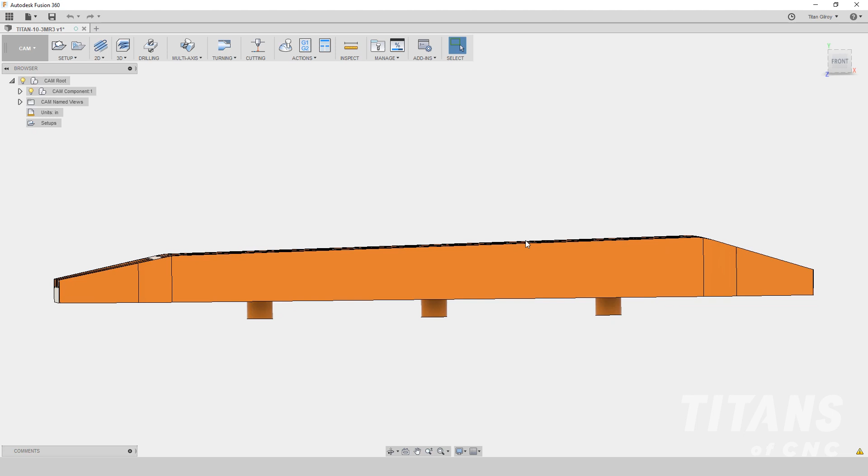See, this is smaller than this, so it's actually tapered. So you can't just mill it and flip it over and cut it. You'll actually have to multi-axis surface all the way up. You got to cut all through here, all the way up here, boom, boom, boom. You got to make it happen.

And then check this out—boom, there's islands. Yes, let's just make it crazy. Let them have some fun. And that's what we're doing.

So when looking at this part, if I did this side first, then when I flip it over, the whole thing would be cocked, right? It'd be kind of weird, hard to sit. You'd have to create soft jaws to make it parallel.

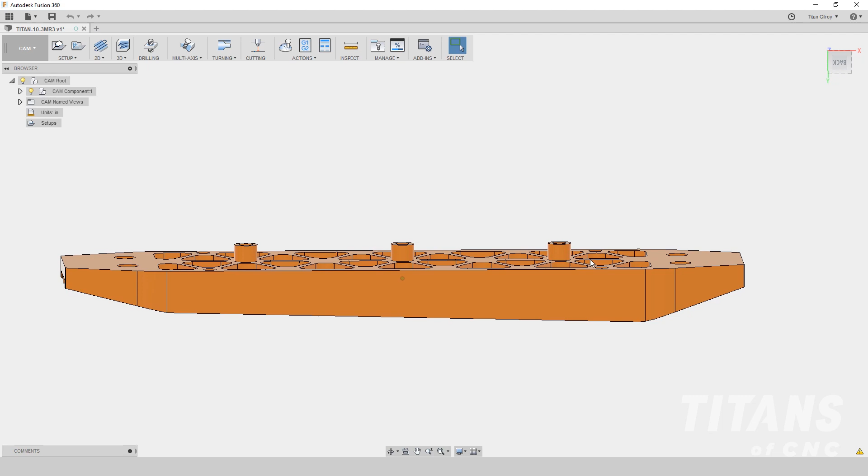So what I'm going to do is actually do the bottom first, that way you can set it in soft jaws or hard jaws and actually set it nice and flat, then do this side afterwards. So first side, we're doing this side. We're going to cut the pockets in right now, profile it, and make it happen. Okay, so let's do it.

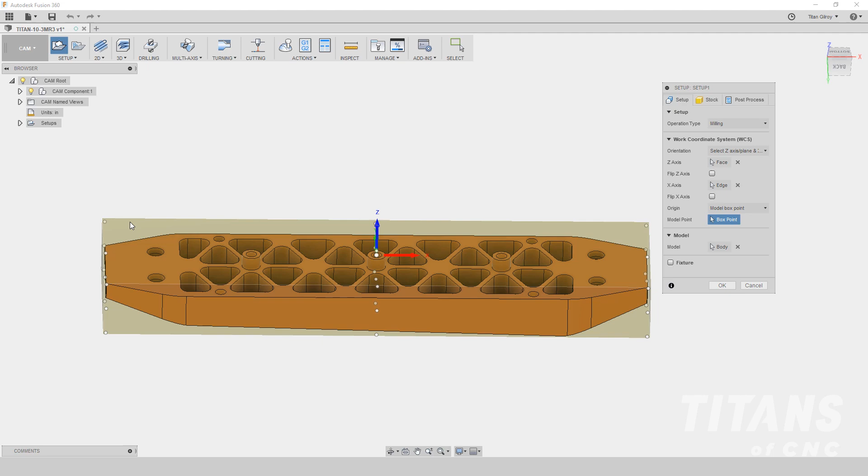First thing we're going to do is go up to setup, come up here, set up our job. So model Z—I'm going to hit this guy right here, boom. I'm going to come over here. X, it's already in position, but I'll just hit this guy right here. Now I'm going to say model box point. I'm going to hit it right here, boom, boom. Looks perfect. I'm going to come up here to stock.

I'm going to go all sides, 0.050. I'm going to tab down—0.050, 0.050, 0.050, boom, boom. I can see it right here.

We don't have a lot of material here. Usually this is at 750, but now this is a bigger part. From my experience, if you have about 100 to 120 thousandths, that is good enough to hold on to. But right here, if you look at 1x2 material, it means we just have a little bit over 150 thousandths. So I'm going to take, let's say, 25 thousandths off the top, and then we'll take off the rest, an eighth, from the bottom.

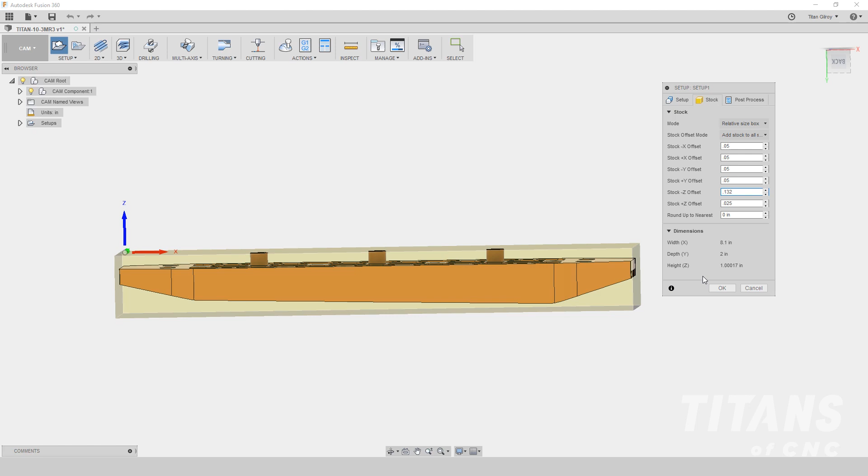So we're going to go right here, and I'm going to go 0.025 right here. And then down here, I'm going to go 0.1, say 132. So I'm real close right here—that's good enough, see that right there? So it's 1x2 by 8.1. So I'm going to say okay, boom, we're all set up.

We're still upper left. It looks a little weird because this is like a bottom surface right here. The surface is so big down here and the islands are keeping it up high. All right, so what's the first thing we're going to do?

We're going to start cutting with our 1/2 inch. If somebody had a face mill that was smaller, like a 1.5 or something, you probably could get it around here, boom, boom, boom, and actually come in and hog this out. I'm just going to use the 1/2 inch cutter.

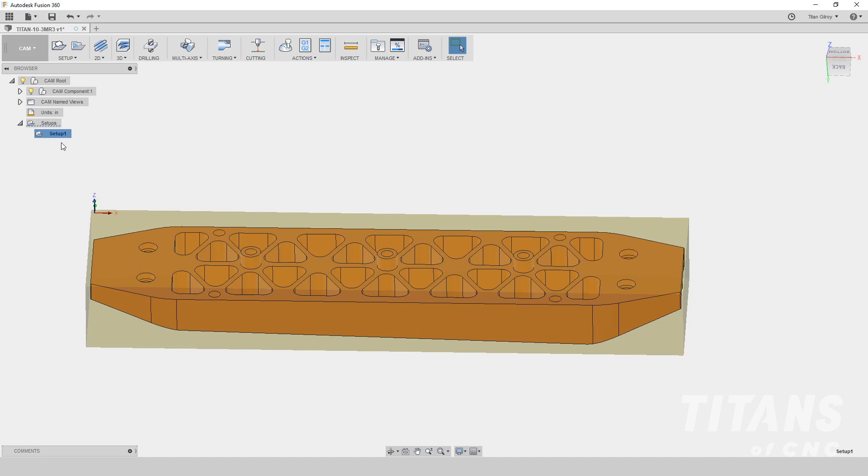So we're going to come up here, go to 3D adaptive, boom. I'm going to grab my tool. I'm going to come over here to building blocks, come right here, 1/2 inch. Oh, right there, okay, 4,000 RPMs.

I'm going to tab all the way through. I'm going to go 25, 25, 25, 25, 100. I'm going to come up here—it already knows where I'm at, it knows where my material's at. I'm going to turn off rest machining because we have not machined anything yet.

I'm going to come over here. Model top, I'll leave it alone. Model top, model top, model bottom. So model bottom, I'll actually go negative point. I'm not going to go that much now.

All right, so we have a sharp corner on that end mill. I'm not going to go too much because I don't want to cut into my jaws, right? So I'm just going to go 0.005, just a little bit, okay? You can see it's just going to be barely anything right there.

All right, so now we're going to come up here. I'm going to come down, boom. I'm going to say we'll just do 0.075 right there.

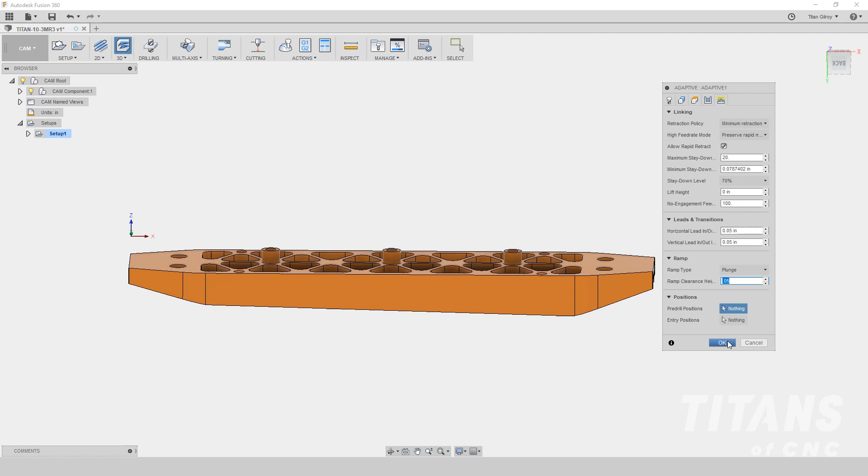Okay, so let's just do it. Boom. You see it up here? It's creating its path. Boom, boom, boom.

And it looks good, so you can see it went around. Path looks nice, it looks clean. So you can see that there's the part down here, the end mill's coming all the way around. It doesn't really matter, we're roughing all this out anyway, you know what I mean? So I'm just saying that the full depth is going around, even though this is skinnier, it's going to be okay.

All right, now that we have roughed it, we're going to go back and finish it with the same tool. So we got to finish the top, finish the bottom, and we're going to profile it with the half inch tool. So let's just get to it.

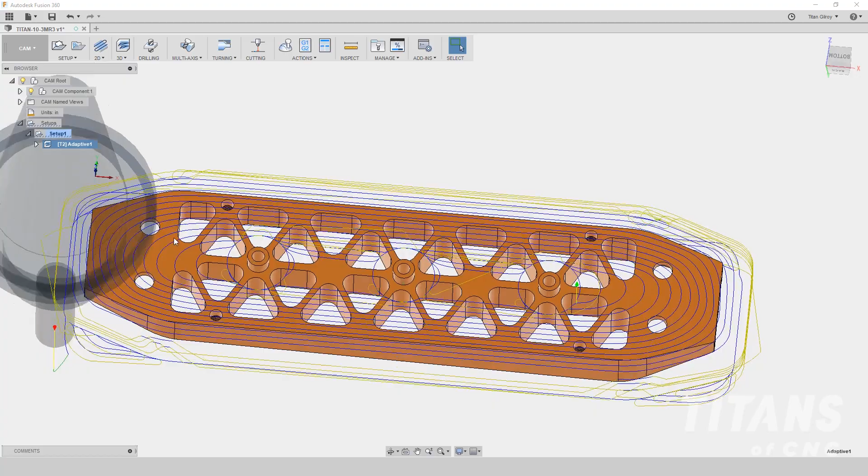So one thing from experience and looking at this tool path and wanting to actually cut off of the surface over here, I'm actually going to prepare something. So just stay with me. I'm going to come back up here.

I'm going to go to model, I'm going to hit model. I'm going to actually come up here, I'm going to say sketch. I'm going to drop all the way down to offset, I'm going to say offset. I'm actually going to come over here to this bad boy right here, click it, then I'm going to click this guy right here. It gives me that offset right there.

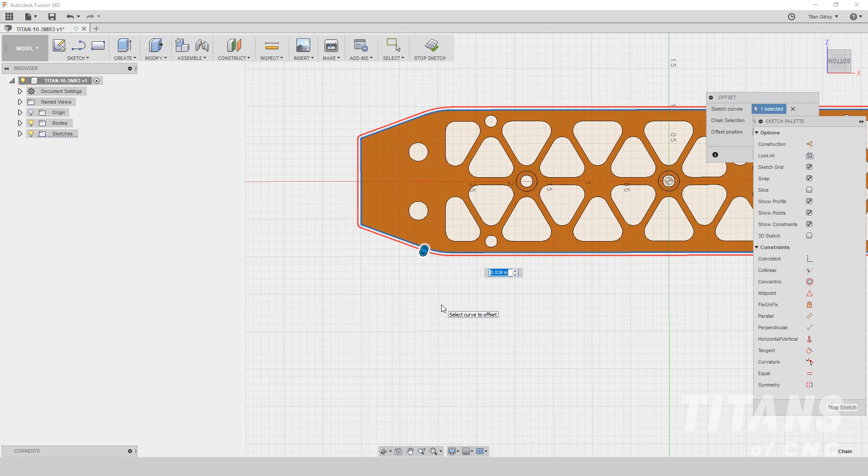See that? So I'm using a half inch end mill. So I actually want to come off and have my half inch actually come off over here. So I'm just going to go a little bit big. All right, so I'm going to go 0.2. See how it does that? Boom. Okay, so that's something kind of cool right there.

And then while I'm here, I'm like, okay, I need a cool tool path that I can just walk across these guys, something quick and dirty. Okay, so I'm going to say stop sketch right there. I'm going to come over here and I'm going to just say line. I'm going to select this guy right here. Boom. All right, I'm going to actually pull this over here.

I'm going to come up here, I'm going to hit that. So I know that this diameter right here is like 2 to 300 thousandths, right? So I'm just going to come over here, pick a line. So looking at this, I'm going to come over here, pick a line, boom. Then I'm going to draw a line coming all the way over here, off the part, boom, right? Then I'm just going to escape.

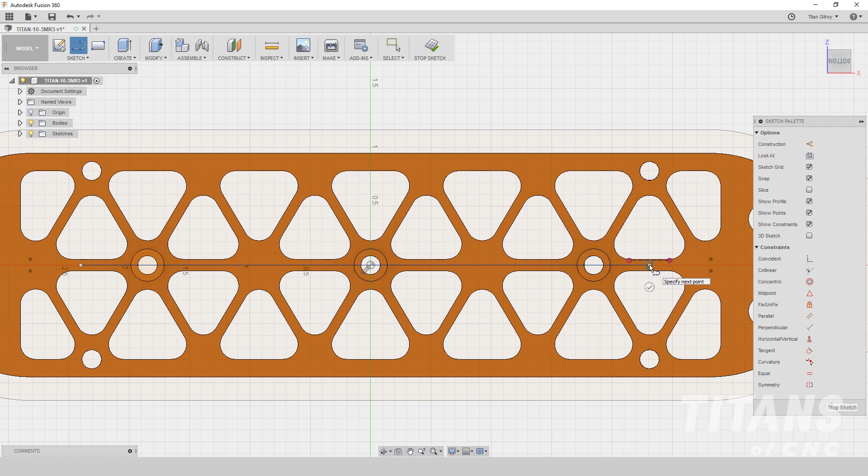I'm going to say stop sketch. Now check this out, so now I've prepared myself. So I got this line and I got this line. So I am prepared to go ahead and be strategic about my tool paths. Got it?

So now I'm going to come back up here. I'm going to drop down to cam, first thing I'm going to do is I'm just going to take this right there, like boom, right down. Now that I'm back over here, I'm just going to click over here, regenerate toolpath, get that guy back. All right, so we are ready to go.

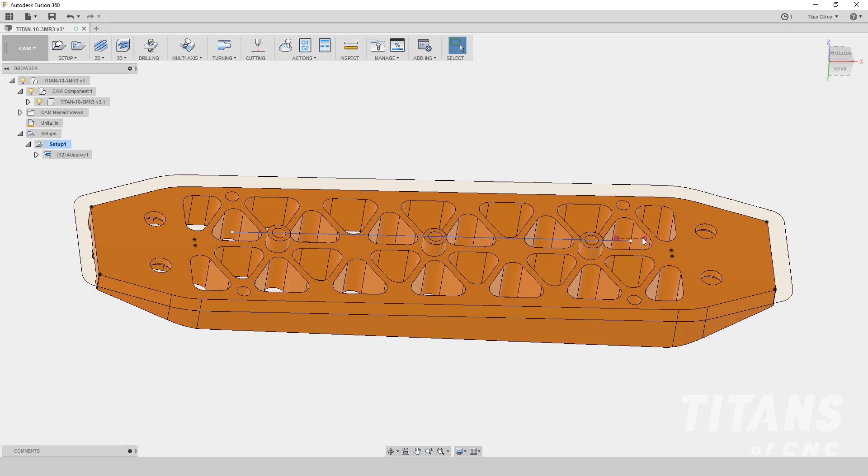So I'm going to do something a little bit different. A lot of times I'll use 2D contour to contour things, but since I'm going right across the top right here and following this line, I'm going to do something really simple. So I'm going to come up here, I'm going to go 2D, I'm going to actually drop down to trace.

I'm just going to trace the center of that line. It's going to be quick. All right, so I'm at 4,000. I already got my 1/2 inch in there. All right, so I'm going to drop down 25 inches a minute, that is fine. Boom, boom, boom, 100, we are good.

I'm going to come up here, I'm going to click this line. Boom, the arrow's going in the right direction. If I was running production, I might make these lines shorter, so I basically feed, rapid, just to save those seconds, right? But in this particular training exercise, I just created one line and that's it, okay?

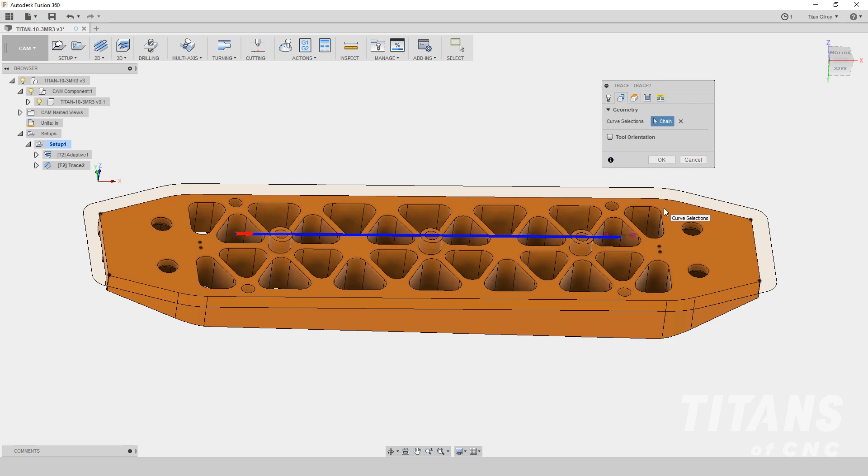So production is a whole different story, we're always thinking about the shortcuts, okay? So right now I'm gonna come up here, I'm just gonna say model top, basically model top. Over here, I'm gonna be model top, all the way down, boom, boom, boom. So it's 4, 2, now over here I'm gonna say 0. I'm gonna flip it around. I'm just gonna double check and you can see that I am perfectly right on that surface.

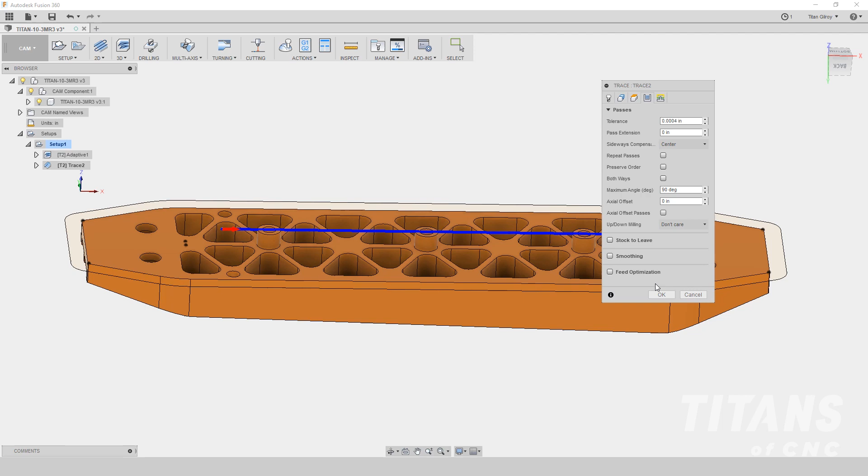So we're just going to finish the top of these guys right here, all right? So I'm gonna come over here. Now, this already says center, and as I come down, everything looks perfect. See how easy that was? So I come over here, I actually don't need a lead in because I'm dropping down into thin air over here, right? So I'm good to go. Let me hit it, boom. Oh, look at that, so it just drops down, boom, comes across, lifts up. Now that surface is perfect.

The next thing we're gonna do is actually finish the bottom surface right here where we roughed everything out. We left a little bit of material, we're just gonna come back and kiss it. And we're gonna do a pocket, okay? And that's where this outside perimeter is gonna come into play, okay?

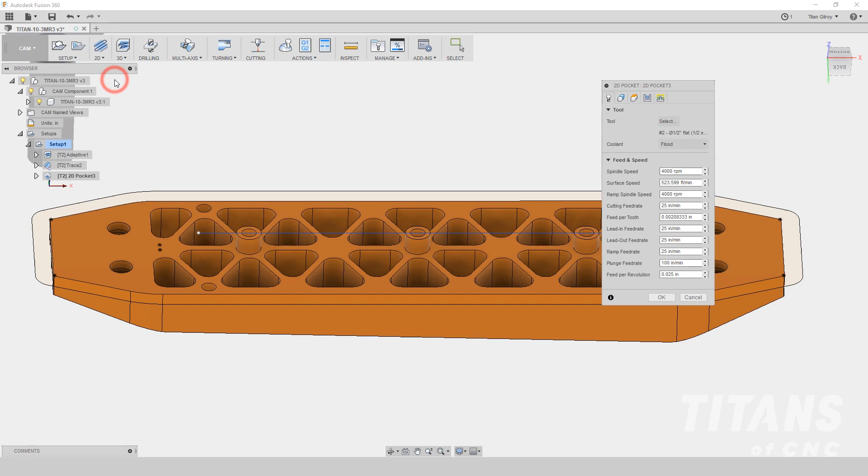So we're gonna come up, we're gonna hit 2D, I'm gonna drop down the pocket, got my same tool, 4,000, boom, 25, 25, 25, that all looks good. I'm gonna come over here now. Now, I don't wanna cut into these guys, so let's hit that guy right there, let's hit that guy right there, let's hit that. We're telling where the islands are, we're telling the CAD CAM where the islands are. All right, and you can see it makes everything dark out here. But if you look at the shape, it's actually the shape of our material because that's what it understands, right?

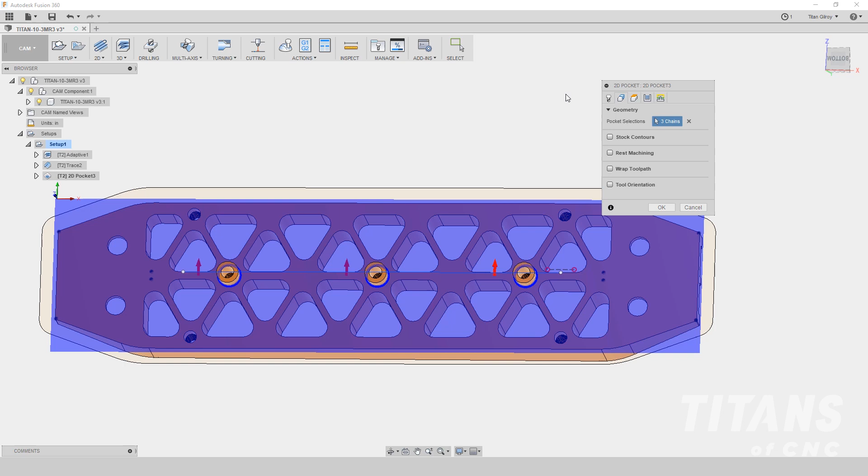But what I'm gonna do is I'm gonna tell it where I want it to go. So I already got 3 of these guys, now I'm just gonna click this guy. Boom, and see that, it all turned dark. So now it understands the surface and it's a 1/2 inch end mill. This is a couple 100 thousandths right here. So a 1/2 inch end mill is like that big and it's gonna go off the surface and basically clean everything up. All right, so that all looks perfect.

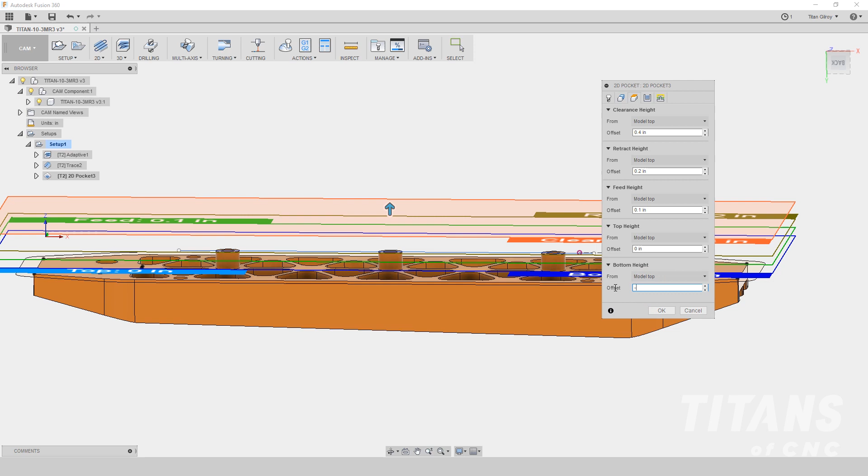So next thing I'm gonna do is come up here. I'm on model top, model top, model top. Top height is model top, 0, and that's correct, but now I need to hit this bottom surface, which is 200 thousandths below. So I'm gonna say model top, but I'm gonna go negative 0.2, okay? So negative 0.2, that looks good. I look at it, eye it up, yep, it looks good, okay?

So I'm gonna come up here. I'm left hand, I'm climb cutting, everything looks good. My maximum step over, I'm just gonna say, here we go, 0.3, okay? So you gotta be careful because if you take too big of a step over, it might leave like a little divot, or like how they say cusp over here, okay? We definitely don't want to leave like a little mark. So 0.3 should be fine.

Now I'm gonna drop down. I am finishing the axial, the Z, so I'm going to hit 0 right here, but over here, I'm going to hit 0.005, that's 5/10, I'm going to hit 5. So I'm leaving, radially, I'm leaving 5 thousandths on each one of these, and it's 0 on the surface. Okay, looks good.

All right, so now I'm going to drop down here. Everything's perfect, this probably doesn't even matter, I'll just put 20 inches though. Stay down distance, boom, this is good. That's good, because it's going to drop in and basically just do this little 50 thousandths like radial right inside, boom, come around. All right, so that all looks good.

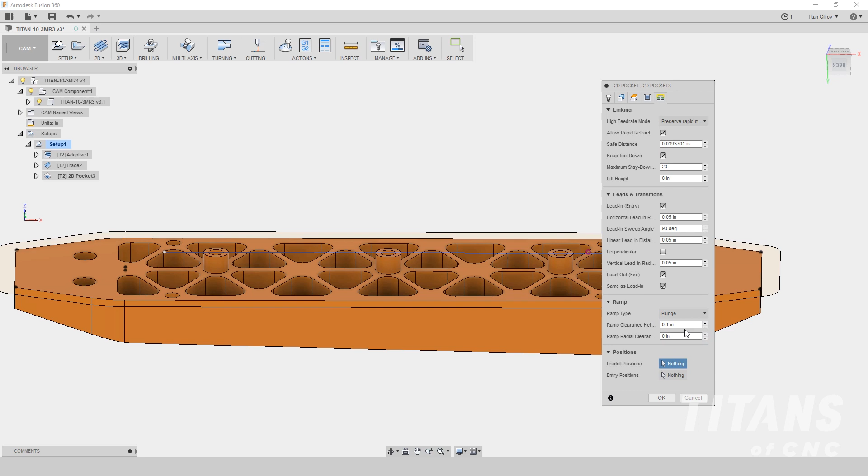I'm going to change this to plunge, right? Because there's no extra material, it doesn't matter, and I'm going to just come straight down. Actually, let me just double check. So pre-drill, plunge, yep, and I'm going to say okay. Boom, ah look at that, look at that.

So it just looks like a beautiful finished pass. You can see the cut comes all the way over here. This is the center of the tool, and you can see how wide the tool is. By looking at this, you can tell it's coming all the way out, so I know my pass is perfect. It looks good, right? But I don't like this little thing right here.

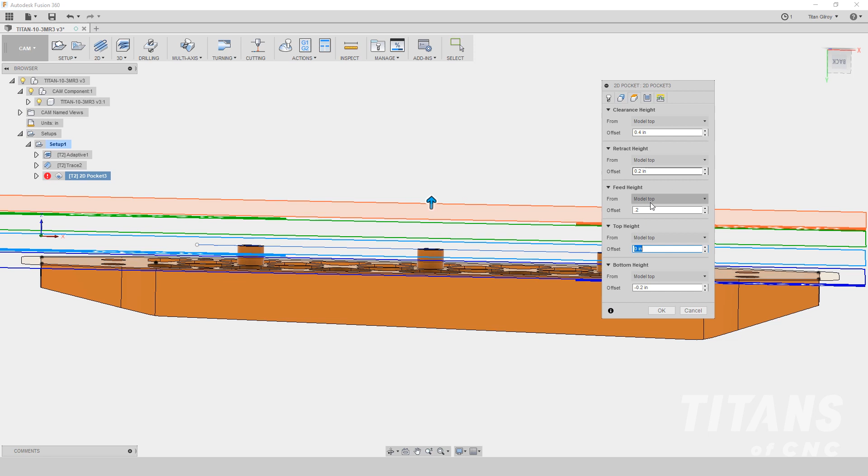So I'm going to come over here, right click, boom, come back over. Basically, I believe it's telling me to raise some of this stuff, which doesn't always make sense to me, but I'll just do it. So 0.4, 0.2, 0.2, 0, -0.2. I hit OK. Boom. See?

A lot of times I like to just get down, boom boom boom, move up, get down, go close to the part and stuff. But this thing's a little weird sometimes. If it was me, I might have left the yellow alone - it wouldn't have mattered, it's just a warning. But since this is education, I wanted to go back, lift everything up, make sure we are completely safe and that you guys are getting it.

All right, so we are good to go. Now we have roughed it, we have traced the top, we have done the pocket. Next, let's finish this guy. So the pocket finished the bottom, but we left 5 thousandths here. Let's actually finish these guys and then we'll finish down here.

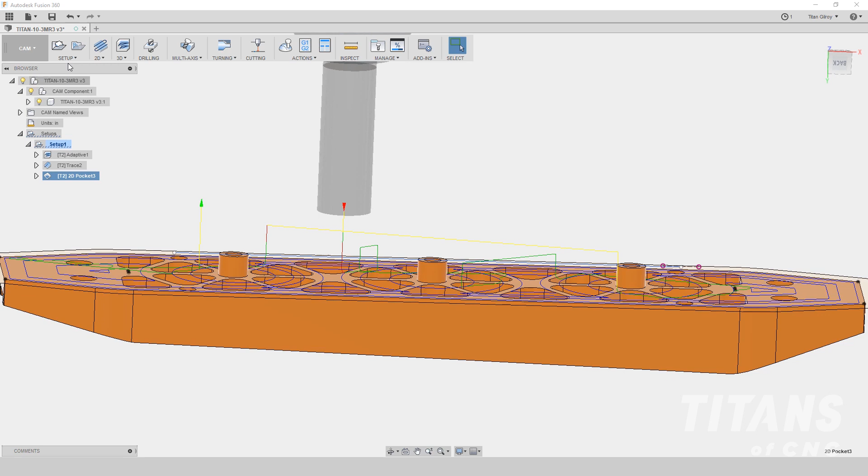So the next thing we're going to do is come up here. Boom, I'm going to drop down to the contour. Tool's already right there - 25, 25, 25. That all looks good. I'm going to come up here. It says nothing. I'm going to hit this guy, hit this guy, hit that guy. Boom, boom, boom. Arrows look perfect.

Now I'm going to come over here, same thing, boom boom boom. Model top is top height. Now check this out - I'm going to tell you something. When you actually surface the bottom and come back with a completely different pass, it has different pressures and different things. We're finishing, but it has a little bit different pressure because it's actually side milling instead of just bottom milling, right? So what I like to do is I don't want to cut in and leave any marks.

So on the previous pass, when we did the bottom, we did it at 0.2, Z -0.2, which was this surface. Now I'm going to keep it up about 5 tenths. On this part it ain't going to matter, you're not going to see it. But basically, when I finish it, I'm going to keep it at 5 tenths higher, and that'll make it so my tool doesn't dig in. It's just a little trick, a little thing you got to think about as a programmer, okay?

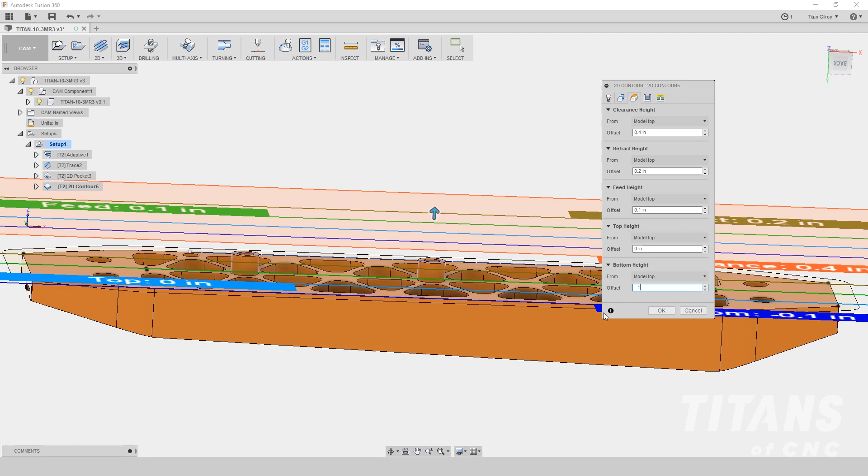So right here, I'm going to go -0.1995. Got it? That's just a hair less than 200, so it's not going to dig in. Makes perfect sense. All right, so I'm going to come back up here. Boom, cutter comp, I'm going to say wear. I'm going to drop down. Boom, boom, boom, that all looks good.

Come over here, this all looks good. Now, just because I don't think it matters too much, but I'm just going to put this at 0.1. That'll all be good. And I'll say okay. Boom.

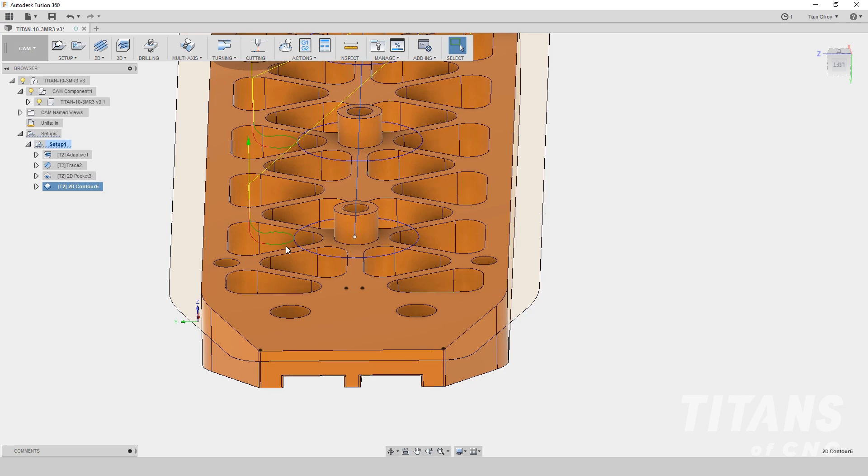All right, so you can see - it's a big pass, but it's all right. You can make it smaller if you guys want, but it basically comes in, boom. That was like 100 thousandths right there. Then it's like 50 thousandths, and then it's 100 thousandths right here. Comes around, then it gets your tool off. Boom, boom, boom - did this one, did this one, did this one. Came over here, not sure why, but it looks clean.

Part looks good. All right, so the next thing we're gonna do is we're gonna actually go around this side. All I'm gonna do is come over here. I'm actually going to click this guy. I'm going to drop down to duplicate. It duplicates it. I'm going to click it.

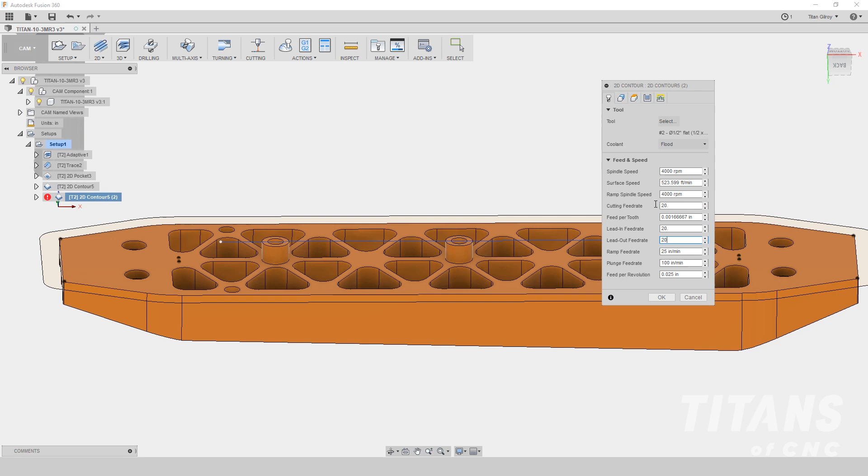I'm going to right click it. I'm going to edit. Because we're only at 4,000, I want to make sure this thing's beautiful. How about we actually drop this to 20? So I'll go 20, 20, 20, 20, 100 right there. Boom, boom.

Murdering it. All right, so right here, boom. I hit that guy, right? So I look at it. I'm like, oh yeah, it looks good. There's no double lines, there's no chamfers. That is the line I need to go.

But check this out, it's on the wrong side. I need to be over here, right? So if I look at it, it's on the wrong side. So let me click it. Boom, it's on the outside. Now it looks good, all right.

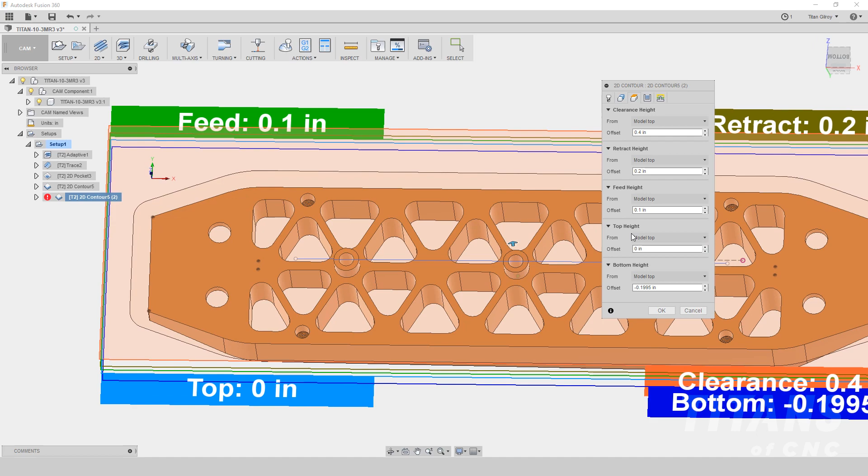So I'm going to come over here. It says model top, model top, model top. This is model top, which is right up here. But over here, I'm going to actually say model bottom, and then I'm going to click this guy right here. Let's say negative 0.020, that puts me just a hair down right there.

I'm going to come up here. I got 4/10, 25 thousandths. Boom, boom, that all looks good because we already did it. Boom, boom, boom. I'm going to come over here. This all looks good, this is good. That's all good, and I'm going to say entry point.

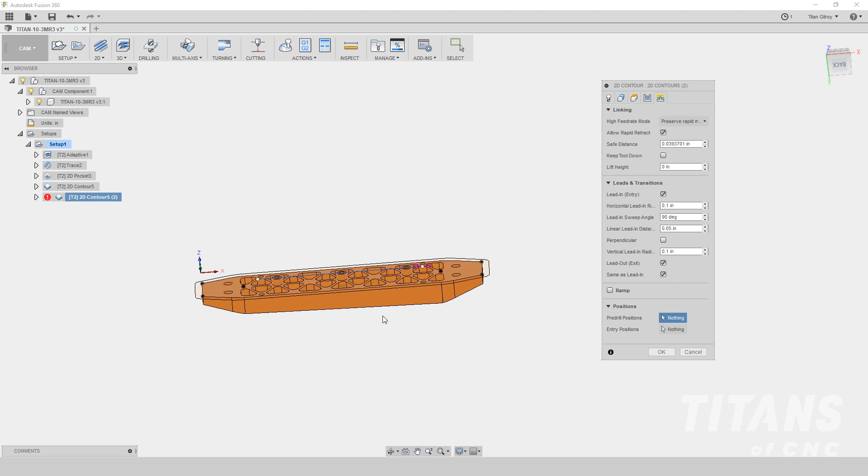So now that I'm coming around the part, just because I like to see everything, the vise, I'm looking at it right here. So I'm right here looking at this part. I don't want to start way out over there, I want to start over here. So I'm going to say entry position. I'm going to actually click this guy right there. See it? And then I'm going to hit this guy. Boom.

Nice, see it? Nice, beautiful. So now we roughed it. We finished the top, we finished the bottom. Finished around these guys, the posts, the islands. Then we finished around the outside. And now we're ready to go on to the next operation.

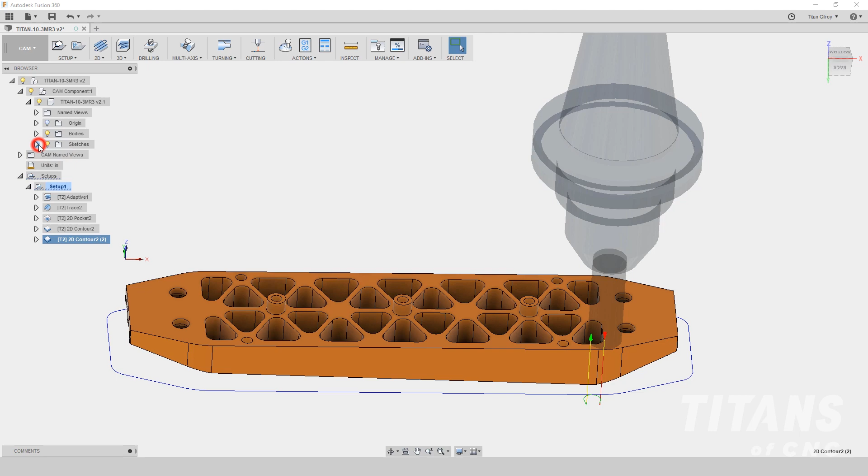All right, so let's go and actually do some more preparation, okay? First thing I'm going to do is turn this guy off and turn this guy off. I'm going to come up here, drop down right here, boom, go to sketches. Boom, I'm going to see how this thing is. These guys are right there, just going to turn them off. Turn them off, I'm just going to go right back up there. Boom, boom, we're good. All right, so now I have to be strategic, okay?

So I have to bring in a 1/4 inch end mill and clean out all these pockets right here, okay? So I have to be very strategic in how I'm going to approach that, all right? So do I want to helical down with my tool? I think there's too many of them, you know? So because we might make a lot of different parts and stuff, I'm just going to do a certain technique. I'm just going to pre-drill it.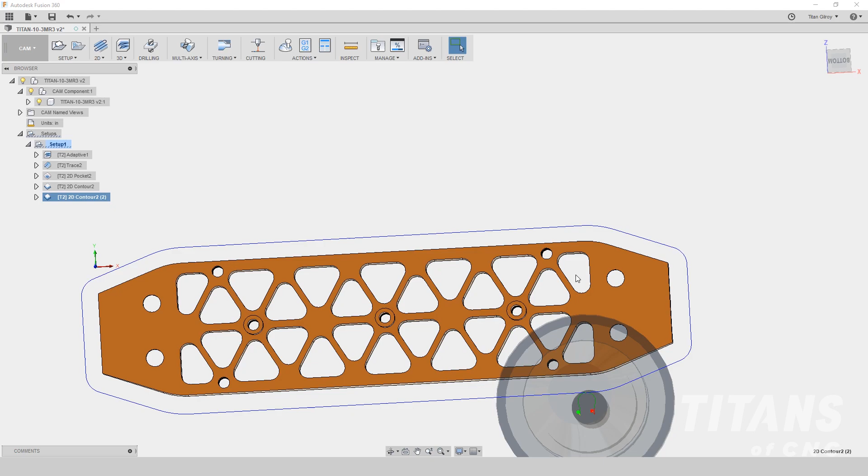Because I know that this right here is just a hair more than like a 1/4 inch right here, and I'm going to just use a 1/4 inch right here. Okay, so I'll drop in a 1/4 inch drill in each pocket. And then I'll make it so when I rough it, I can actually go fast into the pocket and start roughing it, okay, and it'll just make everything better and easier. So we're going to do a little work beforehand and it'll make it easier later.

So I'm going to come over here, I'm going to come up, I'm going to actually go into model. I'm going to come to model, I'm going to actually come over to sketch. I'm going to say point. And then I'm going to come over here. This is the surface, boom. It gives it to me right there.

Now bring it so I can totally see it, like right here. Click that guy so it's straight. Okay, so now this is a 1/4 inch, so I actually have a pretty good idea how big a 1/4 inch is, right? So I got a lot of space in here if I just drop down in the center of these guys. So I'm just going to click, boom.

I'm kind of looking at this, I'm looking at this, I'm looking at this. I'm just clicking these right there, boom. See it? Boom. Boom, so I'm just eyeing it. I'm just eyeing it. Boom. Boom.

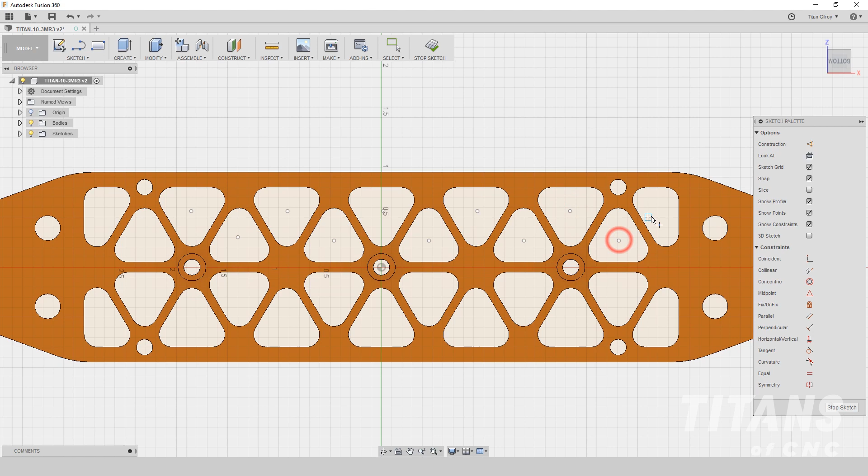So I got all these points right in location, everything looks perfect. All right, so I got to make sure that I have a point in the center of everything. That's where my 1/4 inch drill is going to come through, and I got to make sure that it's not going to hit the sides. Okay, so I just eyed it. I can tell that if this is a 1/4 inch diameter, that's definitely not going to let it hit. Okay, so I got to double check all of them. If you wanted to, you could draw like a 1/4 inch diameter right here, like boom, draw them. But I'm pretty confident, okay, so I'm going to hit escape.

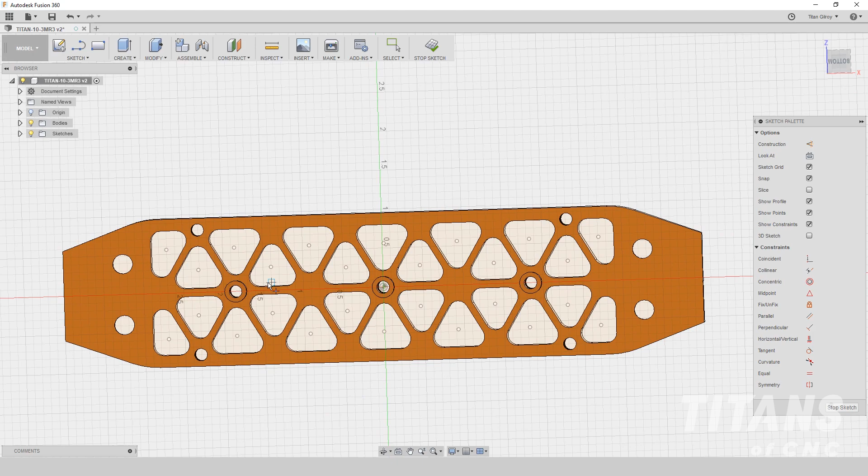And then I'm going to just say stop sketch right here. I'm happy with that guy right there. So I'm going to come back up, I'm going to come down to cam.

Just going to regenerate real quick. Boom. Get all these guys back in line. Come back over here to my last one.

So now we're going to pre-drill. And you know what, I'm thinking ahead. As I pre-drill all these, since this diameter is 380, how about I just rough it right now? This one, this one, this one, and this one. I'll just rough them all right now.

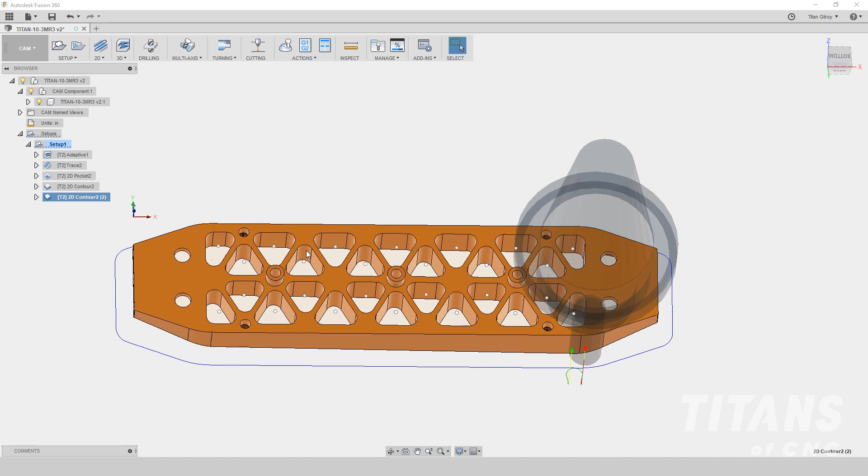Okay, so I'm going to come up here, hit drill, go select my drill. Go to building blocks, I'm going to come down right here. Boom, hit this bad boy right here. We're at 4,000. I'll say 18. We'll just go up just a little bit.

So this drill, this is a carbide drill. Like, it is a beast. But I'm just going to start off nice and slow. Later on I'll speed it up and show you guys what it can actually do. That's going to be in my CNC video.

So I'm going to hit that guy, hit that guy. That all looks good. Boom, boom, boom. I'm going to come up here, go select points. So I'm going to select this guy. Boom, and then let's just go. All right, so I'm going to hit this guy. Boom, boom, boom, boom, boom.

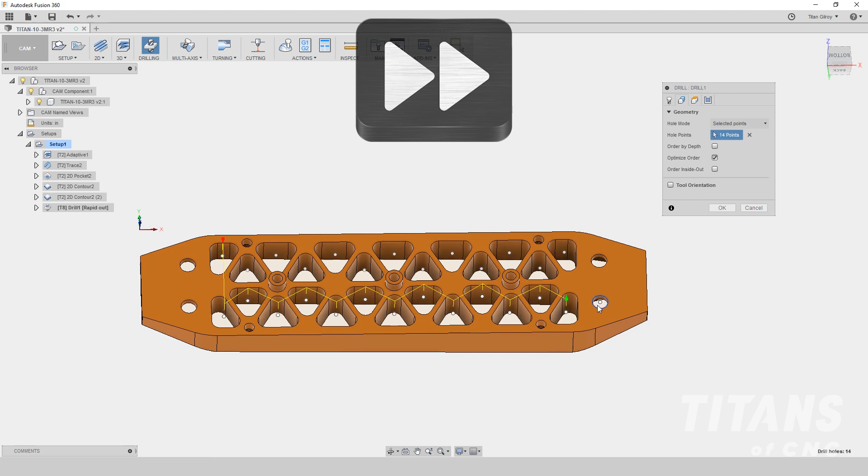All right, so the path looks good. Let's go ahead and move on. We'll click right here, so I don't want to waste too much time over here. So we're at model top, boom, boom, retract height, feed height.

So model top, I'm actually going to say -0.1. Okay, now over here, top height, I'm actually going to say -0.2. That puts it right there. And then the bottom height, I'm actually going to say...

I'm going to look at the overall thickness of my part. So I'm actually going to go like -1 inch. It'll probably just peek out. I can actually look at, I can see it coming out. So you know what, maybe I'll go like 0.950. And you can see it's breaking out.

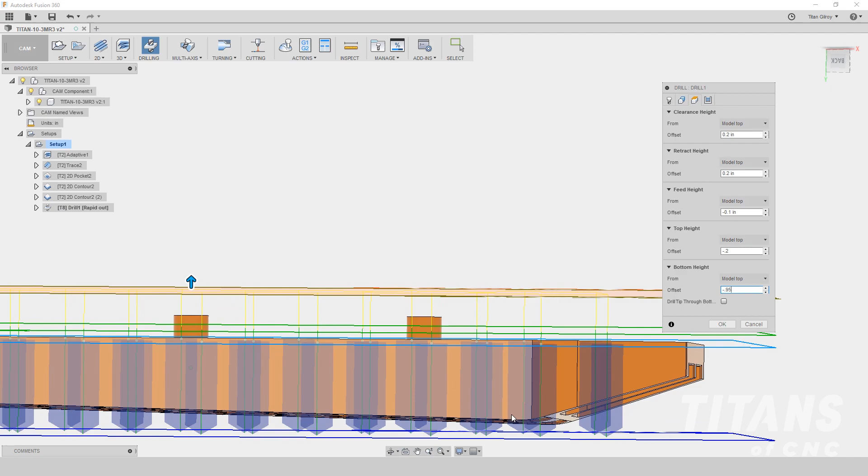So the one that I'm really worried about right here is this guy right there. But it is making it through, so I think we're going to be good. You're just going to have to look at your overall depth, and you got to put a pin down inside and make sure that you went deep enough, okay? And that your end mill is going to have proper clearance, but this is going to be okay. So we're going to go 0.95 right there.

So I'm going to come back up here, and this one, for now, we're just going to peck. So we're going to go deep drilling. I'm going to say, so this is a 1/4 inch, so I'm just going to say 0.100. That looks good. Boom, boom, boom, say okay. And there you go. All right.

So now we have pre-drilled all of the pockets. Okay, so now we need to go and rough all of the pockets. So the next thing that we're going to do is go exactly that, go rough it.

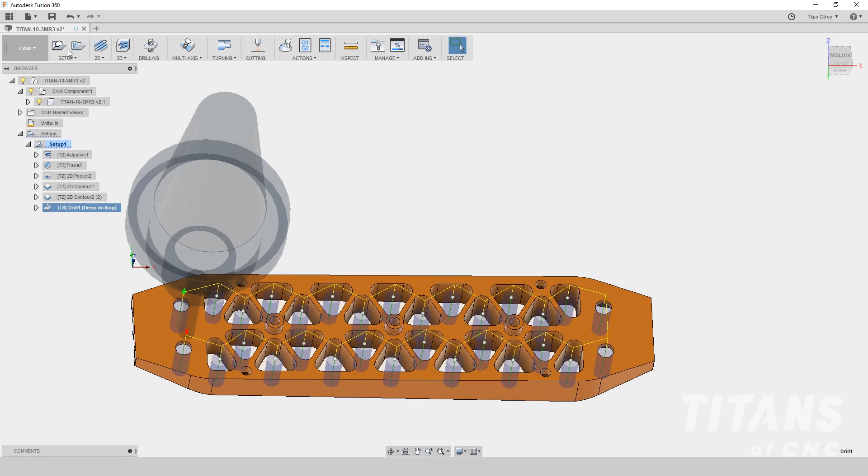So I'm going to come up here. We've used 3D adaptive a lot, right, for all the different surfaces. On this one, I'm actually going to switch it up and go to 2D adaptive. So we're going to come over here to 2D, I'm going to hit adaptive. Boom, okay, we have a 1/2 inch up here.

That's not what I want. I actually want to go get the 1/4 inch. So I'm grabbing this 1/4 inch flat end mill right here, 1 inch flute length. I'm going to grab that guy. And I'm at 4,000, that's fine.

Cutting feed rate, I'm actually going to go 25. We're roughing, we're in a tight pocket, but it'll be okay. You know what, I'm going to wimp out on you guys. So let's go 20 because we're in like this tight little spot right here. And you guys can judge for yourself, but there's going to be a lot of little chips and stuff. So let's just go 20.

Let's go 20, 20, 20, 20, all the way down, okay? Boom, boom, boom. Okay, so feed rate, if there wasn't a hole here, then basically this would be way different. We'd have to helical in, and if you tried to just go in at 20, you'd break the tool.

I don't want to go too fast because it's a 1/4 inch going into a 1/4 inch, so there's no room. It's just going to slip right inside. So I just want to be safe. If you guys want to later on speed it up or something, maybe I'll go 25, just a little bit different. That way you can change all feed 25s for that tool to something different if you want to speed it up later.

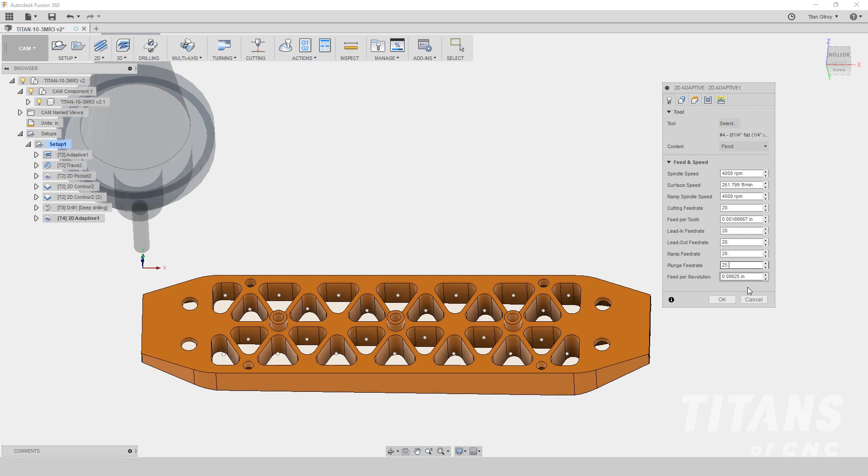Okay, so that we'll leave that at 25. Now this is going to take a little bit of work. Okay, so we just got to be very careful right here.

So this guy, I'm going to click this one. Boom. See how it automatically goes to the outside? I want it on the inside. So I hit that guy. And now it contains it. Okay, then I hit this guy, boom. Then I hit this guy, boom. Then I hit this guy. Then I hit this guy, that guy. Boom. See it? All these little guys will make you crazy, but that looks good to me.

Okay, 26 right there. So I'm going to say okay. Cool thing about programming is like once you program it one time and you do it right, then the part can run for years, you know what I mean? You just got to keep updating it if you get new and better tools and stuff.

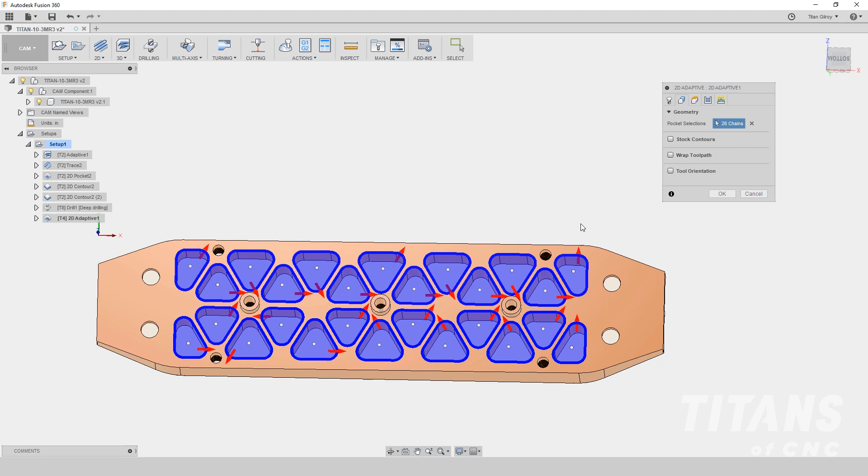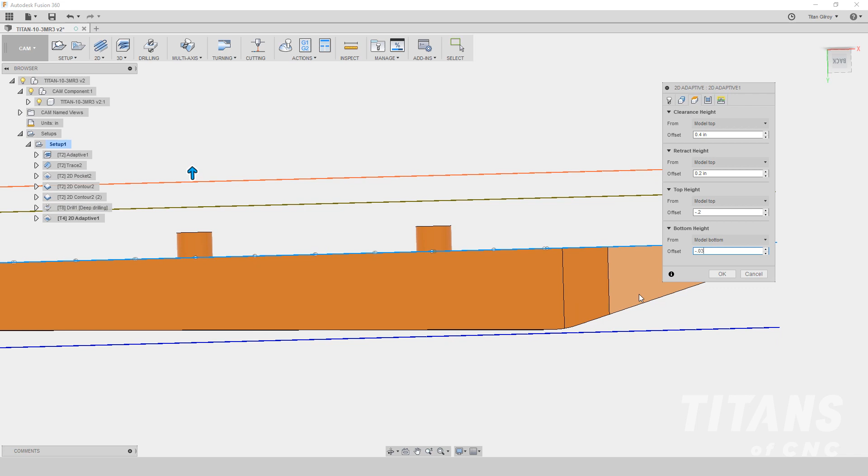So retract, I'm going to go top, model top. Boom. Over here, I'm going to go model top. Boom. So right here, I'm going to go model top minus 0.2. Now over here, I'm going to go model bottom. See it? And then I'm going to come over here and I'm going to go negative 0.030. Okay, so I want to make sure, and you guys got to double check your numbers and make sure that this thing pops away down here. Okay, so I'm going to say okay. Boom. Okay, so that all looked good.

So I'm going to come over here now. Clearance, optimal load. I don't want to get too crazy. Okay, so it's a 1/4 inch end mill. I don't want it to be taking a big cut. Okay, so right here, we're going to say 0.03 right there. It can take more, but I'm actually going to go a nice healthy Z depth, which will make it better.

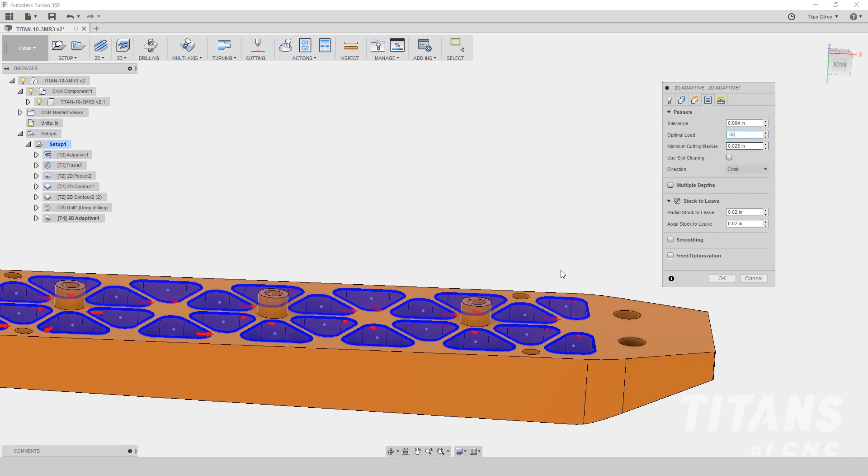All right, so we're going to go smaller radial, and then we're going to come, that's fine. Actually, you know what? I'm going to get right in these corners, so I'm going to make this really small right here. So I'm going to go 0.004 right there. That means like in the corners, the radius that it allows and stuff. Okay, so I'm going to do that.

Boom. We're climb cutting. Now multiple depths. Yes. Okay, so it says maximum step down. So I'm going to say 0.4 quarter inch, but we're taking a small radial. Okay, so I'm going to say that's fine. And then I'll look at how it stacks up, how the cuts stack up, and then I might change that depending. All right, so now axial, I don't need anything.

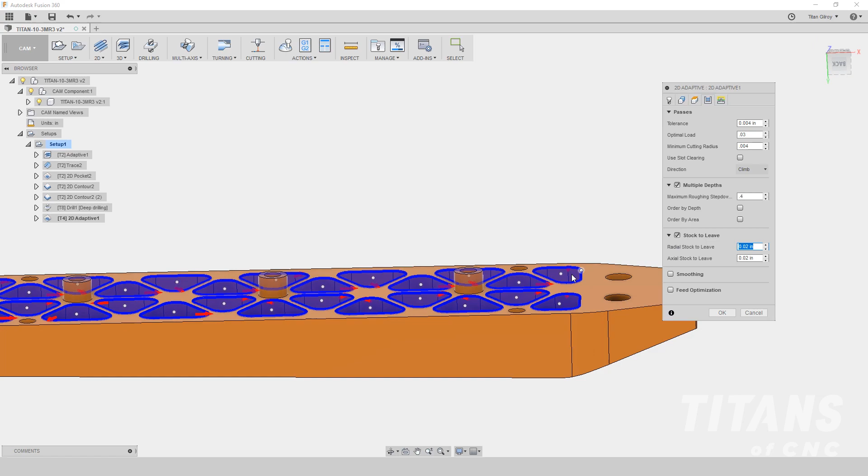Radial, I'll leave something. But here's the trick. I don't want to leave a lot of material on the radial, because when you come into this little place with a tool that fills this all up, you can get chatter in that corner right there. Okay, so what I want to do is just kiss it, okay? So I'm going to do like 0.004, all right? And then I'm going to drop down, I'm going to do 0 on the axial, okay? Then I'm going to come up here, boom, this is all good.

It's all good. I'll say like 70%. That should be good. That's good. No engagement, it's a small tool. We're not going that fast and stuff, so it has a hard time even speeding up in that little thing right there. If it was anything else, I would actually speed this up. Right? You know what, let's just speed it up just a hair. Okay, so we'll go to 40.

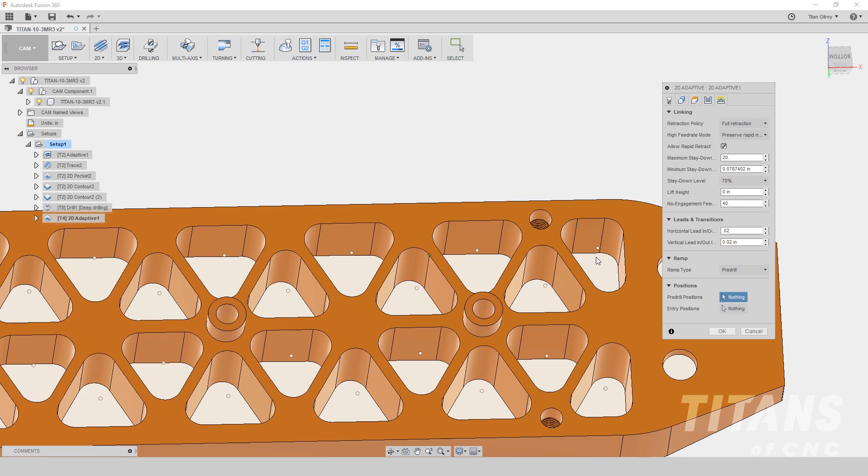Hoo-hoo. Okay, so lead in transitions, 0.020, that'll be fine. Now, this guy, we're going to pre-drill. Then we're going to hit this guy, pre-drill locations. And then I'm just going to come back over here. Our last tool ended up, I think, over here and stuff. So we'll just come back here. We'll go boom, boom, 2. Keep track though, 3, 4, 5, 6.

25, 26. 26 it is. All right, so let's see if it works. Okay, so I'm going to hit OK. Boom. Come on, adaptive. Let's do it.

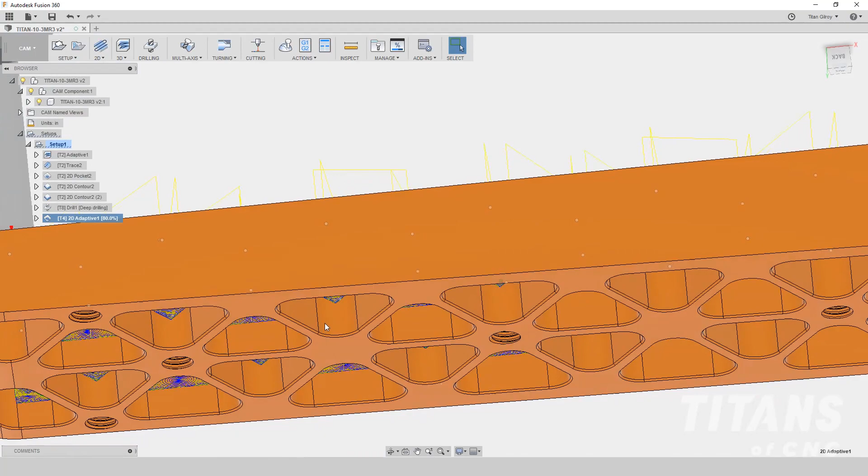Let's do it, so you can see it. Like, so it's right there. It seems like it's way down there, but it's not at the bottom. It's not at the bottom. If you were doing like a million of these, I would drop and make these shorter. You know, I would come through, make these shorter, make them longer, right? Because I want to have the shortest runtime possible.

But on this particular one, it is going to be okay. So basically, we went deep enough to handle the deepest over here. You got that bad boy right there. Nice little small step over.

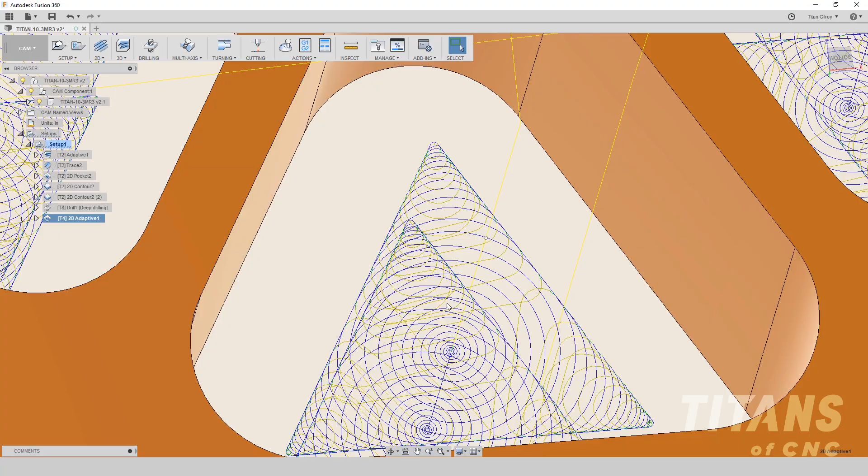If this doesn't actually work good for you, you've got to make sure you flood the coolant in here, right? Because it's going to come here and you'll have all these chips coming out. You've got to make sure you flood the coolant and get those chips out. If perchance you break a tool or it's not working right, you can just drop down at 200 thousandths at a time or something, but this should be fine.

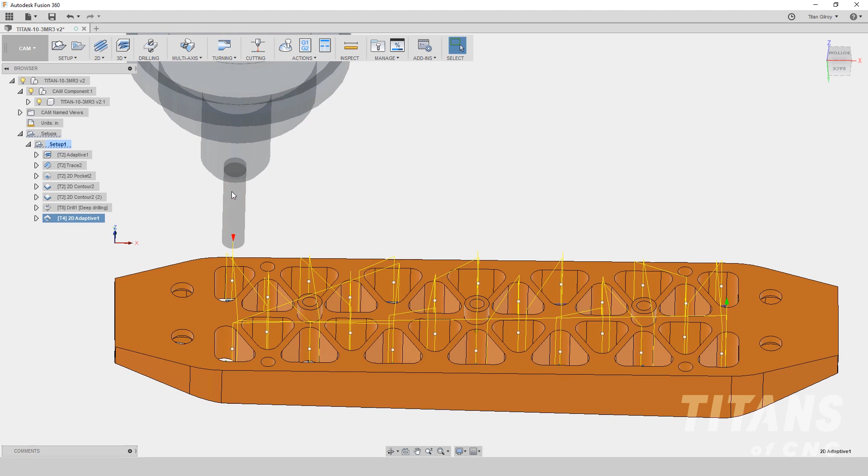Okay, so now we've got that whole thing roughed. Next, we're going to bring that same tool in and finish it. One thing - you've got to make sure your holes and pockets are clear. If I was actually making an aerospace part and it mattered, I'd take this tool, rough it, and then have a completely separate tool to come in and finish it. The finishing tool might have more flutes just to give a better finish.

But this should be fine. I would probably drop full depth and finish it all at one time, which I think I'm going to do right now - with the same tool, go full depth. But if it doesn't work for you guys, just break it in half. I just don't want to leave that little line right there, okay?

So we're going to come back up here, we're going to actually say 2D. Boom, I'm going to come down. Okay, I already have my flat end mill right there, and I already have my 4,000 RPMs right there.

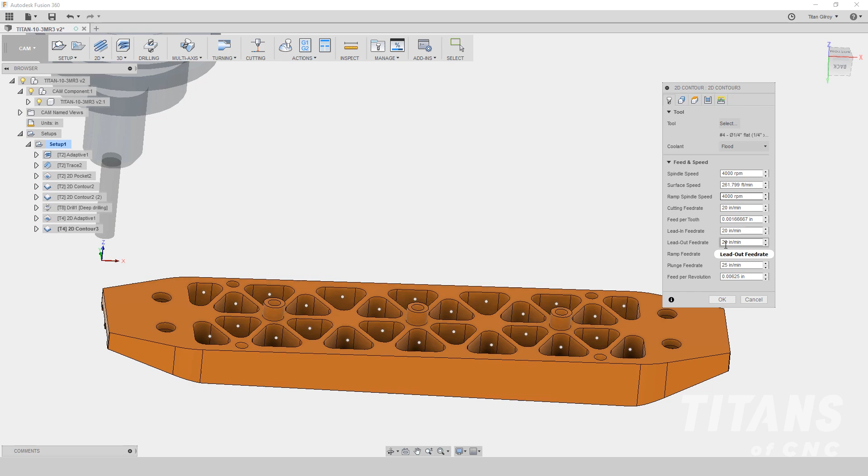On a finish pass going deep into these corners, you might want to slow this down a little bit. But I'm going to just leave it alone because 4,000 isn't that bad. What I'm going to do, because I don't want to take any chances - and we're not taking a lot of material - I'm just going to slow it down a little bit. So I'm going to take this down to 10... 10... 10. There's no material there, so I'm just going to go 50 right there.

Okay, so we're going nice and slow inside there. This is not how I'd run it in the real world, but this is what I'm telling you guys right here because I want you guys to be safe and see the passes. After that, you can speed it up a little bit and see how it goes. Again, sometimes you've got to step twice down - instead of going all the way to the bottom, you'd just go like half an inch and then down to the bottom, you know what I mean?

So this is good. I'm going to come up here. Boom, and now we're going to finish it. So click it, click, click, click, click, click.

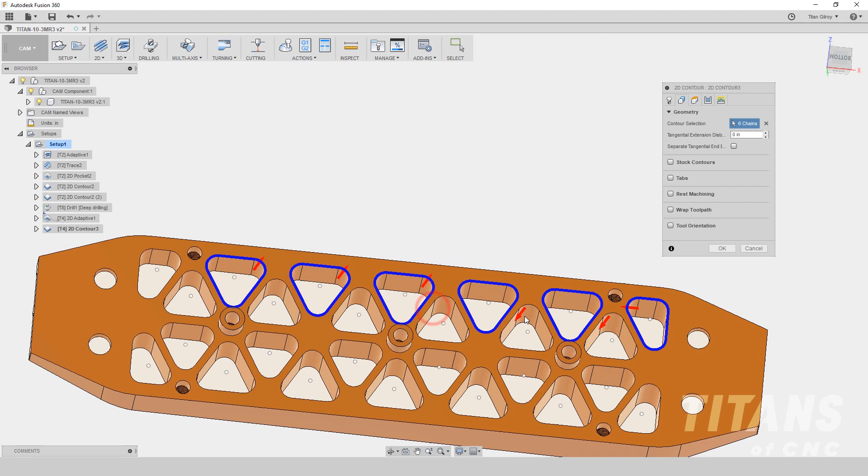Is that on the inside? Throw me off. Click here, click here. I actually just want to look at that real quick and see, make sure those are on the right side. So now I've got this guy right here.

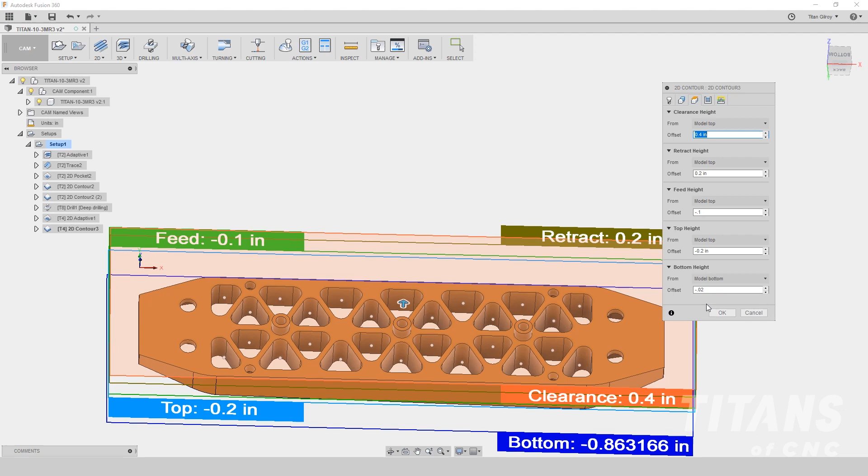Model top, feed height, top height, model top. Let's say negative 0.2 - that's the top height. Feed height, negative 0.1. This guy right here, I'm going to drop down, so I'm going to say bottom, model bottom. So I'm going to say negative 0.020. Okay, I'm going to look at it - looks good.

Then I'm going to come up here. Boom, we're going to go... boom, that's fine, that's fine. We're going nice and slow, nice and slow. You know, this is not super precision right here, but we definitely want to take our time and get into those corners and make sure we get a nice surface finish - nice pass, right? So this all looks good, we're not leaving any material.

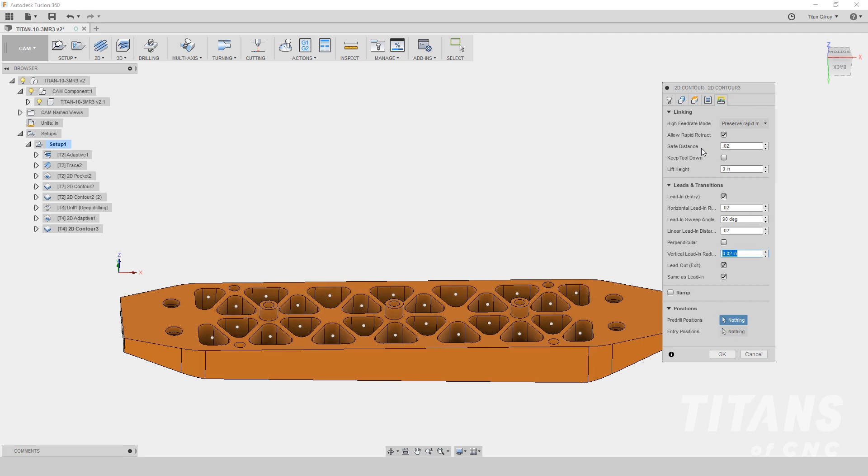So we're gonna... boom. I actually don't need a vertical right here, so I'm not gonna worry about it. So I'm gonna say zero, I don't need anything right there, so I'm just gonna say okay.

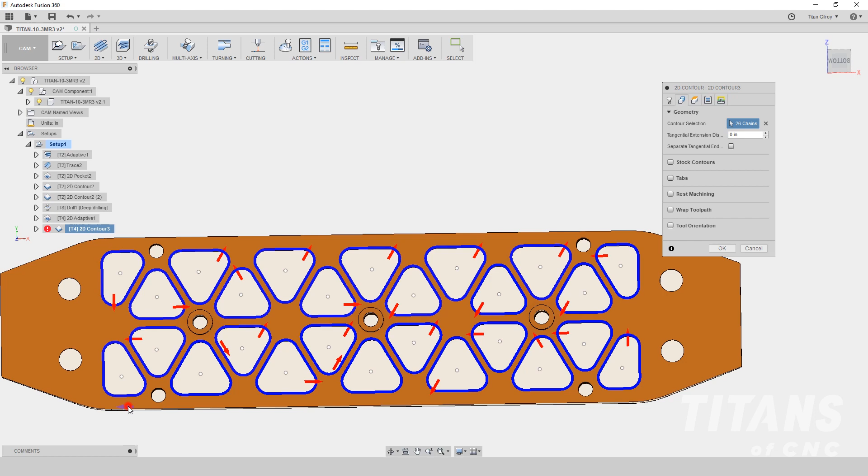Boom. Now, why did it not actually do over here? If I look, I'm like, oh, these guys must have been wrong. Okay, so let me go back over here - I'm gonna go edit, go right here, and I'll click that guy, click this guy, click this guy, click this guy. So I'm gonna say this guy right here. Boom, this guy, boom - this one I didn't even touch. So I'm gonna put that guy in there. This one I didn't even touch. And this guy is going to be boom, boom, boom, boom, boom. Get that guy right there.

Now it looks perfect. You can see it starts right here, but it actually lifts up, moves over, and comes down, meaning it starts feeding below this surface. So that's what we set it up as.

We're using the whole flute of the tool, so this is going deeper. The more rigid upper part of the flute is actually cutting, which keeps it more rigid anyway.

So I'll come in here and look at my lead in, lead out, boom boom boom, everything. Everything looks absolutely great. You can see the radius is nice and small in there, but I think it's just going to make it perfect and beautiful.

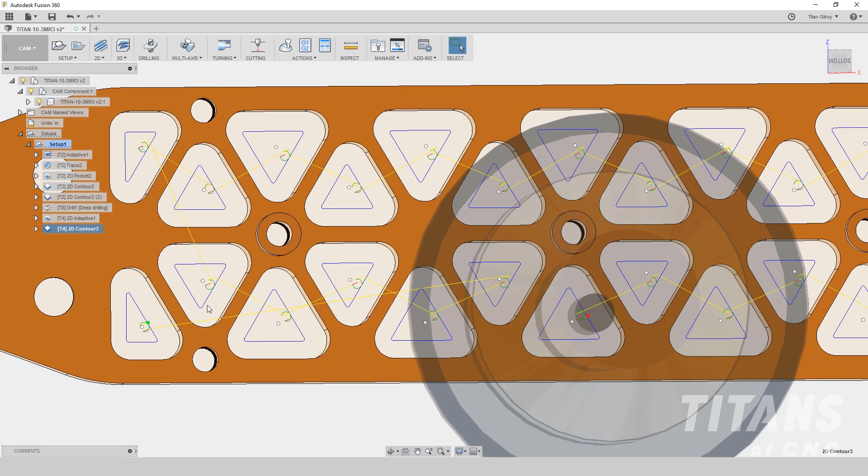Now on this one, it's funny because if the RPMs are too high and you're only going at 10, you just speed the 10 up and put more pressure on it, and you can actually make a better surface finish because the tool won't be bouncing so much. But because it's education, I wanted to tiptoe and make sure you guys were nice and safe.

So now you guys have finished all of those. What's next? I'm not going to worry about the bottom of this guy right now, because the drill actually comes all the way through here, boom boom boom. So I'm not going to worry about that. What I am going to worry about is just deburring everything.

So I'm going to deburr this guy, I'm going to deburr this guy. I'm not going to touch these guys. I'm going to deburr all these little guys.

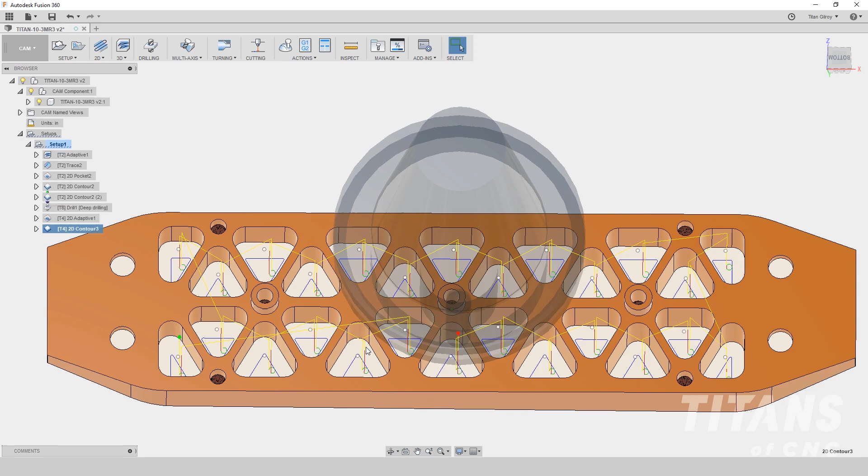So let's go up and get our chamfer tool. I'm going to come up here, go 2D, and select 2D chamfer. I'm going to go up here and select it.

Go to building blocks. I'm going to come right there and hit this guy. Okay, quarter inch chamfer so I can stay nice and tight in here.

It says break sharp edges, 10 thousandths, in the upper left hand corner of the print. So I'm going to come up here. I'm at 4,000, that's fine. I'm going to come down.

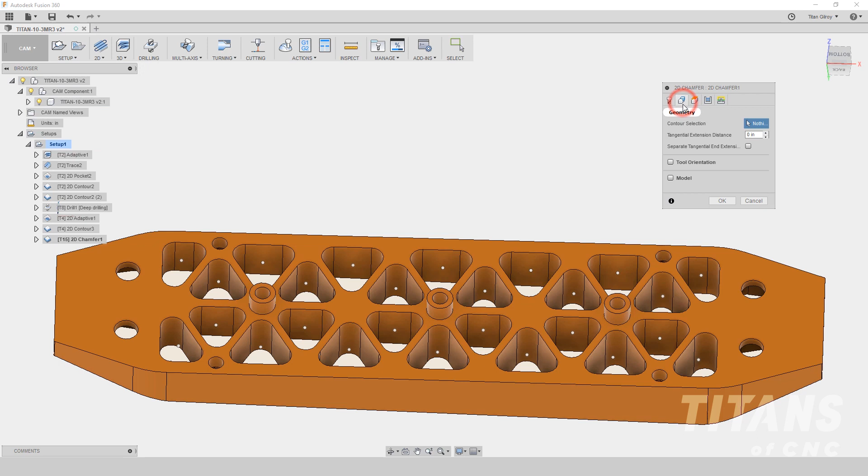Okay, so we'll do 20, just a nice feed rate. Then I'm going to come over here, select, and just hit this guy. Boom, I'm going to hit these guys, boom boom.

So I see this guy over here was already set, so I want that to be on the outside. I want this guy to be on the inside. Click that guy, this guy, this guy, put it in there.

So that all looks good, but it's a lot of arrows, so I've got to go double check it.

So I'm just going to come up here, hit this guy, so model top. We'll just say 0.2.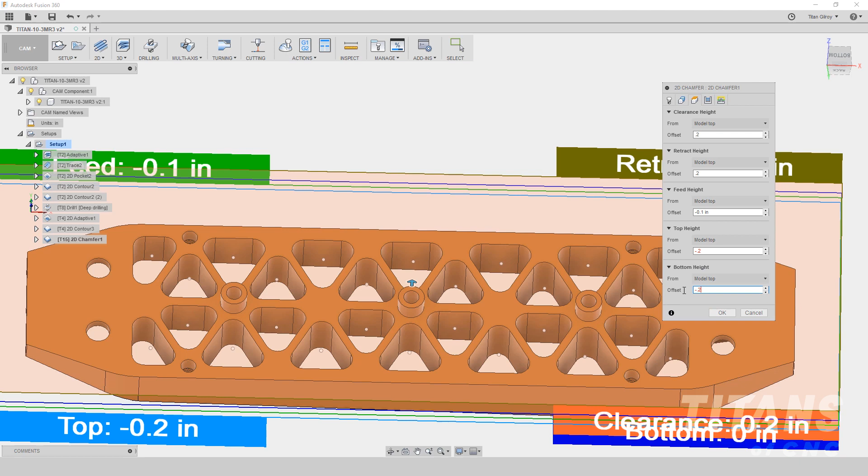Retract height, say 0.2. Feed height, I'm going to say negative 0.1, negative 0.2 for the top height, and then this will be negative 0.2 right there. So it'll be 1, negative 2, negative 2, negative 2, which is down here, because everything's down on that bottom surface right there.

So then I'm going to come over here. Boom, I'm on wear, I'm okay with that. 10 thousandths right here, tip is 50 thousandths. So we just have to think to ourselves, we have a quarter inch tool, so half of the tool is 125. So if we do this, that'll get our tool off.

And I didn't double check what this distance is right here, but maybe I should. Maybe I'll go 0.070 just to stay off it, right? And then chamfer clearance 0.010. Let's see if that works.

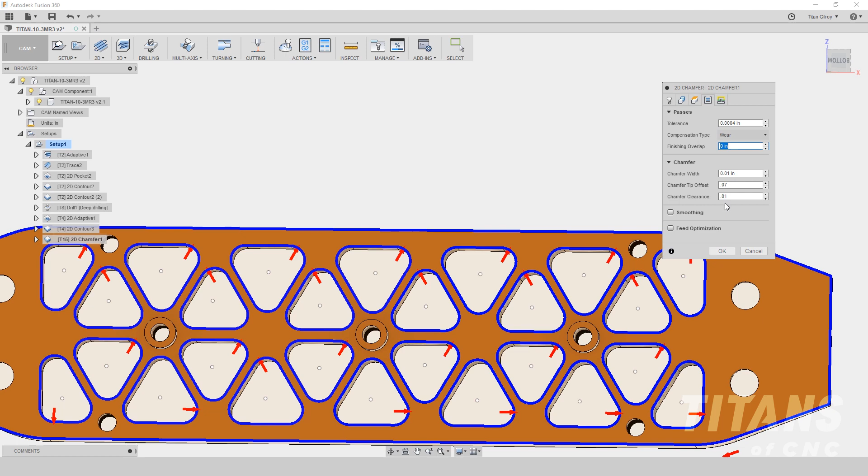I'm going to come over here. Safe distance 0.020 is fine, doesn't matter, 0.020. 0.020, I don't need that. Let's see it, so I'm going to say okay.

See, so it's scared, look at that, it's scared. So it basically did all of them, but it didn't actually do this one right here. Okay, so I'm just going to play with it a little bit.

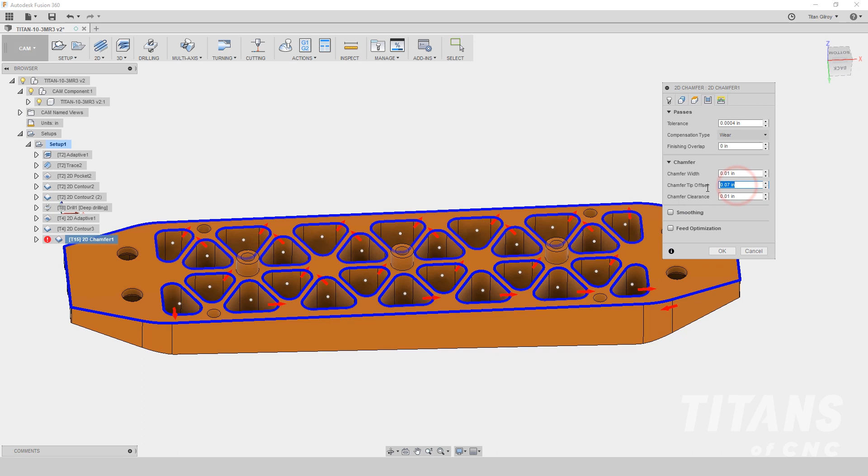So I'm going to come over here, right click it, edit it. I'm going to come back over here to this guy and this tip. So if I'm 70 off, that means 30, 55. That means I have 55 thousandths right there. So I'm going to go 0.1 and use the top part of the tool. I'm going to say okay.

And check it out, it did it. Boom. See? So I was off 0.1.

That leaves 25, I'm using 10 thousandths. So basically the tool, like 15 thousandths will just overhang as it comes around here. But that'll work.

All around the outside, everything looks good. Boom, boom, boom. All right, so now let's just do the same thing.

So I'm just going to copy this guy, right click, duplicate, duplicate. Come over here, I'm going to right click it, say edit.

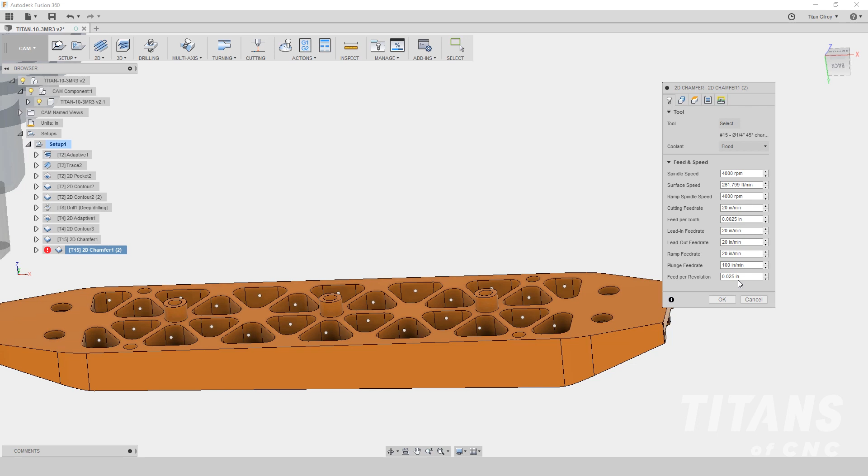I'm going to actually come, that all looks good. I'm going to come around here. I'm going to actually get rid of these guys. Boom, and I'm going to just select this guy.

So I'm going to select that guy right there. Let's select this guy right here. Select that guy right there. Arrows are on the right side because I'm going around the outside.

So that looks good. Then I'm going to come over here. Now I'm not on the bottom now, now I'm on the top. So I got to get rid of these guys.

So model top is model top, model top is model top. And this is 0.1 for model top. So now I just adjusted everything.

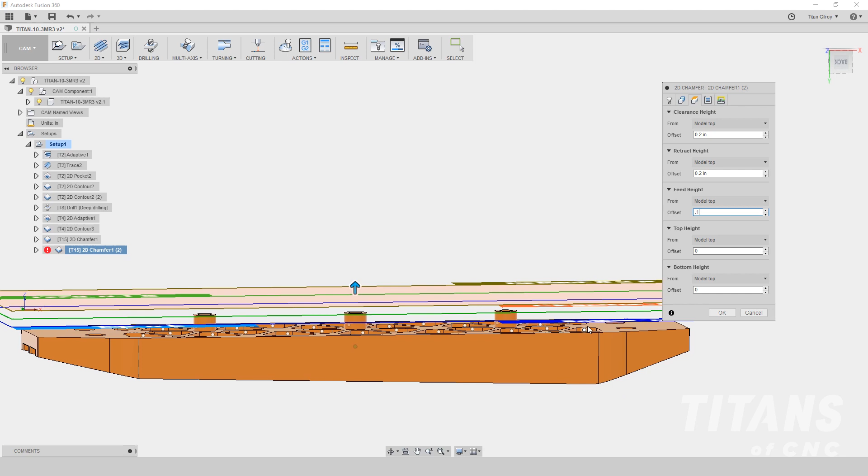So we're cutting this top surface right there. Looks good. All right, so I'm going to come back up here.

Boom, I'm just going to move that right there. I'm going to just put that at 60 just because that's like a normal good tip offset.

And one thing I'll say is that you're dealing with a precision part, right? So usually you want to do these holes at the same time you do the diameter, just in case, so you can make sure that it doesn't walk. But since the thread is coming from the other side, we're just going to pop all through.

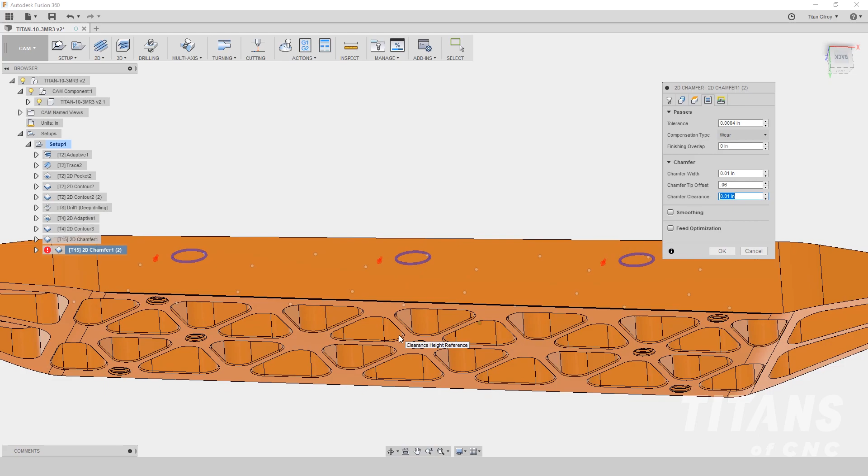And then you'll be able to tell, because if this is skinnier than this, that means your drill walked. And there's no going back because you already finished the whole part. So you got to be careful, make sure that your zeros are perfect.

Ooh, that even makes the Titan-10M even more complicated because you're going to know if you mess it up. All right, so that looks good.

10 thousandths, this one clearance, you don't even need anything right there. So boom, boom, boom. On these guys we'll go a little bit bigger. It doesn't matter, but why not? So that all looks good.

You can see it, boom, boom, boom, boom. Chamfering around the edges. Okay, so now let's come over here. I'm going to right click, we're going to simulate.

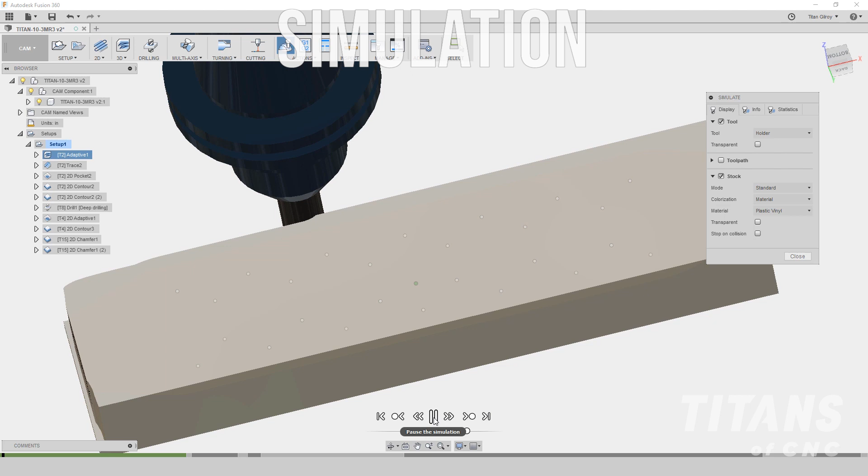Okay, so it's cutting around, cutting around. Speed it up. Oh, look at that, look at that, you see it?

Finishing it, finishing it, slowed it down a little bit. Coming around, coming around, boom.

Finish. Finish. Finish. Drops down, boom. Comes all the way around.

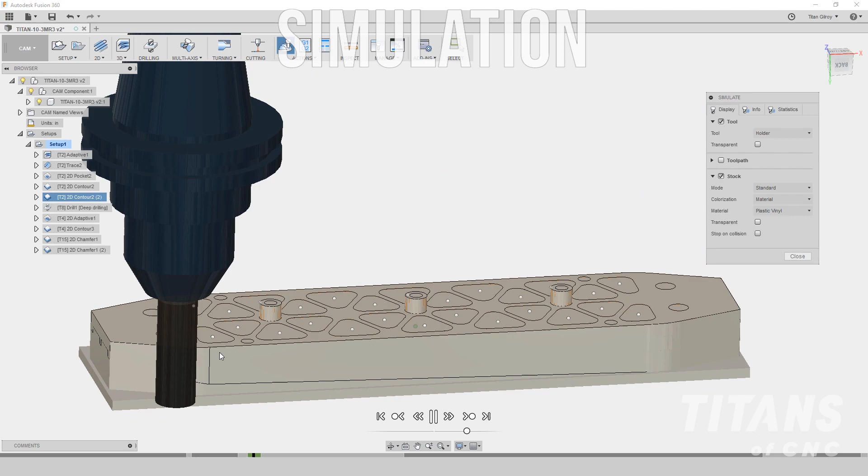Then we're pre-drilling all the holes, I'll just speed through it. Pre-drilling all the holes, look at that. Look at that, oh, money, money.

Yeah, oh look at that. Oh, we're getting it, we're getting it, we're getting it. Oh, look at that, look at that. Roughing it.

Let's go a little bit, let's slow it down and look at it. Okay, so it comes in. Look at that beautiful pass right there.

Comes in, boom, boom, boom, boom. Gets the corner, gets the corner, gets the corner.

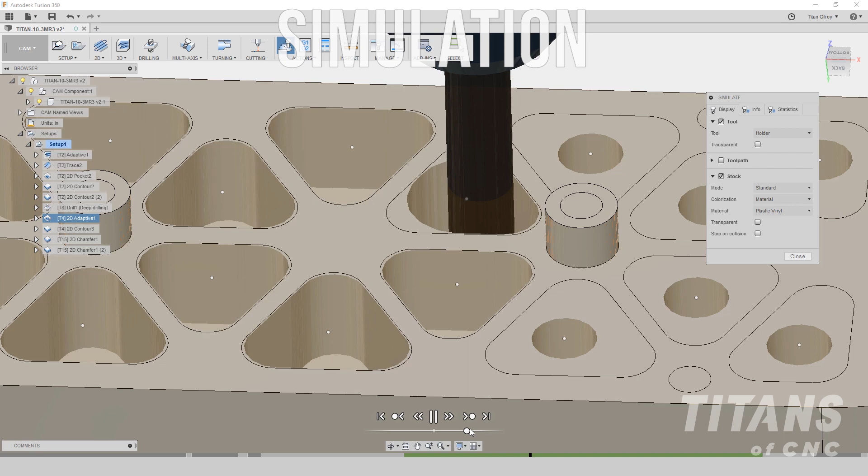Oh, see, in that corner, that's why I have a lot of experience. So that's why I left just a little bit of meat right there. Went in with a small cutter and stuff because those corners can kill you, right? So a lot of people go with bigger cutters and they come back with the smaller ones and they have trouble in those corners right there.

But you can see like it's looking really good. So let's just speed it up. Boom, boom, boom, boom. Oh, going all the way through, all the way down.

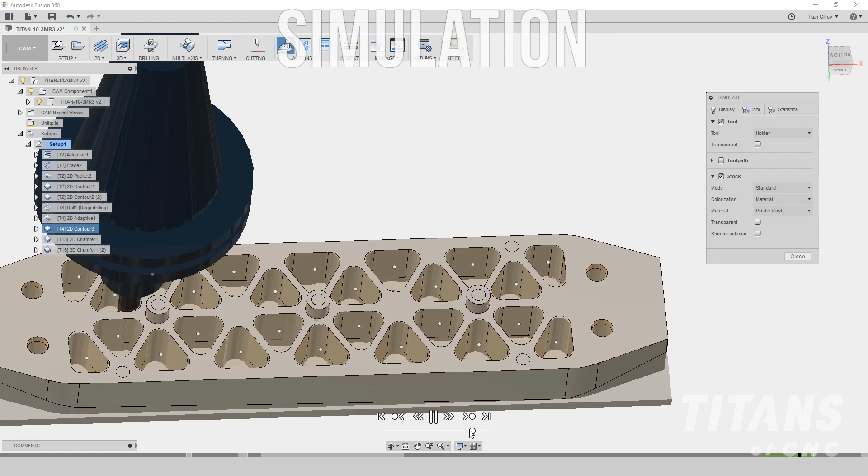So good. Looks beautiful. Finished them all. Chamfering them, oh look at that, look at that. It actually looks like the part. Look at that, it's so cool.

Okay, and then later on, afterwards you'll just flip it over, pop it down, then you'll reestablish your zero up here, right? And then you'll basically just deck all of this off. You'll profile it, and then you'll basically just do these pockets and these holes, and then deburr, chamfer all the pockets. They'll be all tapered, and it'll be like a super sick, crazy part, the Titan 10M.

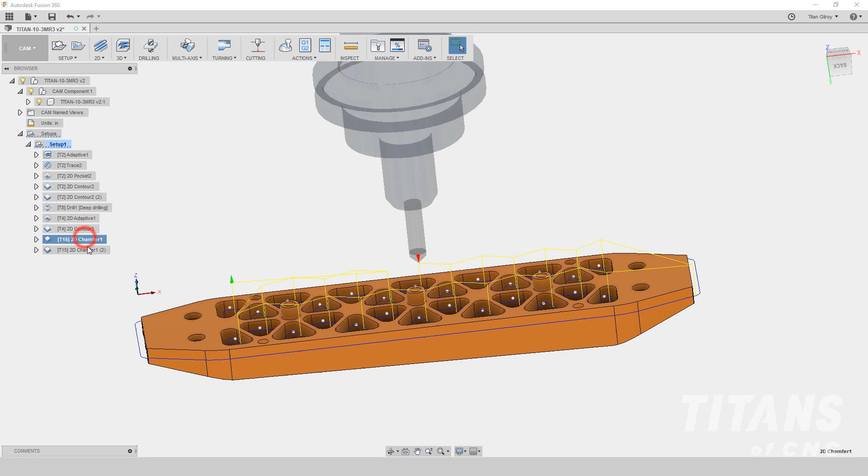Boom, check it out, I love it. So we went adaptive, trace, boom, boom, boom, boom. All right guys, Titan 10M is complete.